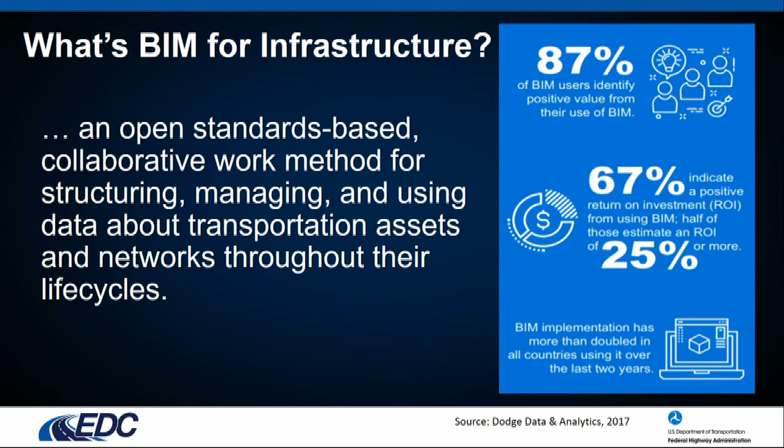Our first presentation is going to be BIM for Structures, the Pooled Fund, and the move to openBIM standards, because data standards are what are going to help us be somewhat more seamless. Maybe not completely seamless, Terry. So we're going to begin with Jennifer Steen, who is the BIM director, I think, for local roads and highways for HDR, and then also Roger Grant, who's the vice president of building technology for NIBS, National Institute of Building Sciences. So come on up, guys.

And do we just use the clicker? This looks fun. I didn't have this in my last one. Oh, and I just realized I have a fun typo right there. So we're going to talk about the pooled fund, which is lots of fun.

Okay, never mind. So today I'm going to talk about the Structures Pooled Fund overview and then pass it off to Roger, who's going to get into the nitty-gritty and the fun part about this project. So, the overview. Has anybody ever heard of a pooled fund before? Okay, we've got some people.

So for those who haven't, what this is doing is that these states, there's 24 states that have come together, and they've pooled all of their money together to do a 5+ year project to be able to do a lot of research. And this is going to help impact all of these states and the US in general. So these are all the states that are participating, and they're trying to come together to be able to develop these standards that we're going to be talking about.

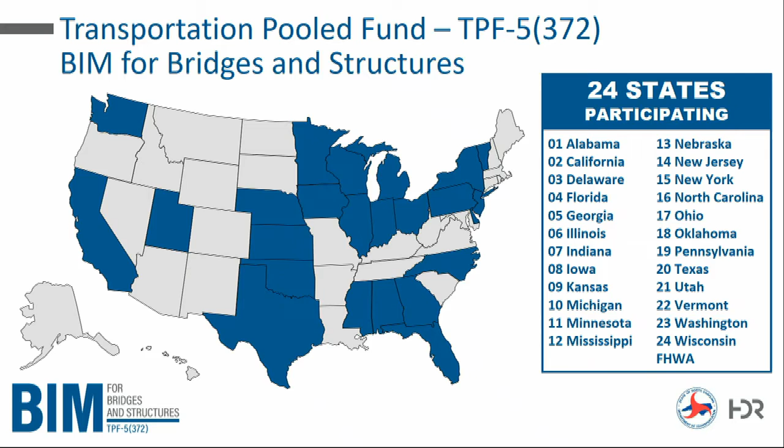So if they try to do this individually, it probably wouldn't work as well. And as we know, $100,000 isn't even like a quarter of some of these NCHRP research projects. So pooling all this money together to really make a change. And so they're focusing on the bridges and structures. So this is the BIM roadmap that they've come up with.

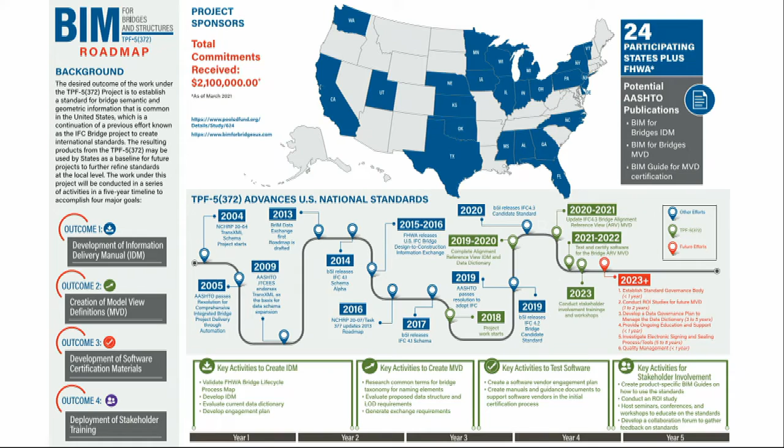So you can see this roadmap online, and as you can tell, we started the project itself in 2018, and then we've continued forward, and then we have some future work that we're doing too. So this roadmap also explains all the outcomes that they're looking for and the processes that overtook it. So next up, I'm going to give it to Roger, who's going to explain all of the fun stuff.

Yeah, all the fun stuff.

Well, thank you. And so I did want to talk about the pooled fund and what it was set up to do and what it has accomplished, and a little bit about why it's important. There's a lot going on in digitization of the way we work. This has been happening for a while, but I think there's momentum gathering and needs are definitely there.

So getting over to digital delivery, getting to transition to using a model of a project versus a set of drawings about a project as the basis for the work requirements is really important and starting to happen, and getting to digital materials to review and approve is also a big transition.

And as David said, I'm with the National Institute of Building Sciences, so we work a lot with vertical buildings, and these kinds of transitions are happening there, but maybe it's taken a while for this progression to really kick in. And in fact, we're seeing in the infrastructure world things moving a lot more quickly. And work like this fund is part of that work that Federal Highway has been investing in, as Jennifer showed on the roadmap in the years prior to the start of the pooled fund, has led up to that.

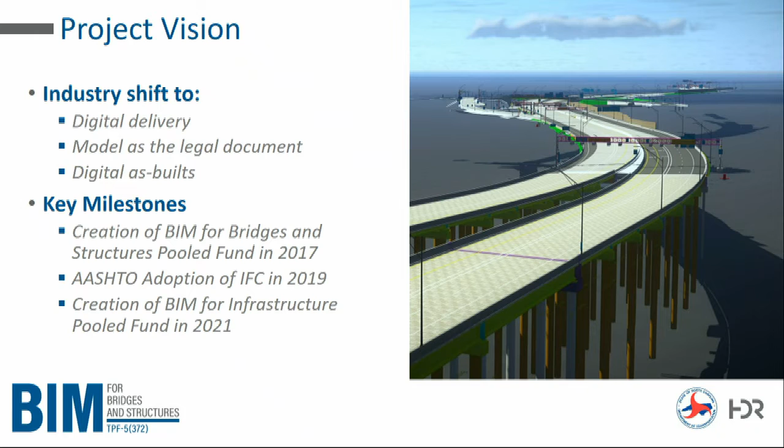And another key factor that you noticed from what Jennifer shared was, a nice thing in infrastructure, there are 50 owners of all the assets that we're trying to use these processes on, versus in the building world, there are thousands and thousands of owners, and the market power is not nearly as consolidated. So that is one of the advantages, I think, in the world of infrastructure and the development of common and shared and digitalized ways of working.

And this is the vision of the project, of the pooled fund, and really, along with what David said about building information management and modeling, it's really to develop an open way of exchanging information that's non-proprietary, that has some value to the owner of the asset, not just to the other people involved in the process.

Certainly, technology has a range of ways of delivering value, but what's really important is to be able to share and exchange information across the whole life cycle and have it be useful for the asset owner. And in order to accomplish this, the idea was to develop an open standard that could be used and the information could be then shared. And so that's where IFC, Industry Foundation Classes model, came into play. It's an international open standard for representing

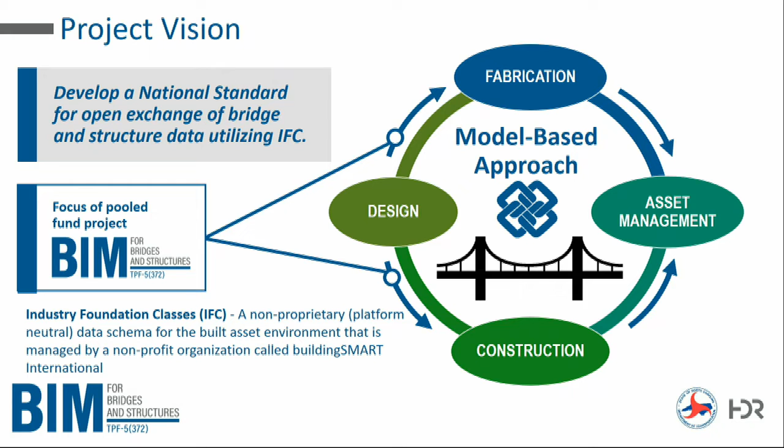data about the built environment. How many people are aware of what IFC is or have some knowledge of it? Okay, a few. So I'll just give a little background on IFC. IFC is one of three standards that work together to achieve interoperability, and it is accompanied by a standard for describing a process, which is an information delivery manual approach to develop a standard process.

IFC handles all the identification of the visual and the data aspects of a thing that's being built, and then the IFD works to create the terminology, a common set of terminology. And in fact, in the pooled fund, we're working with all three of these standards.

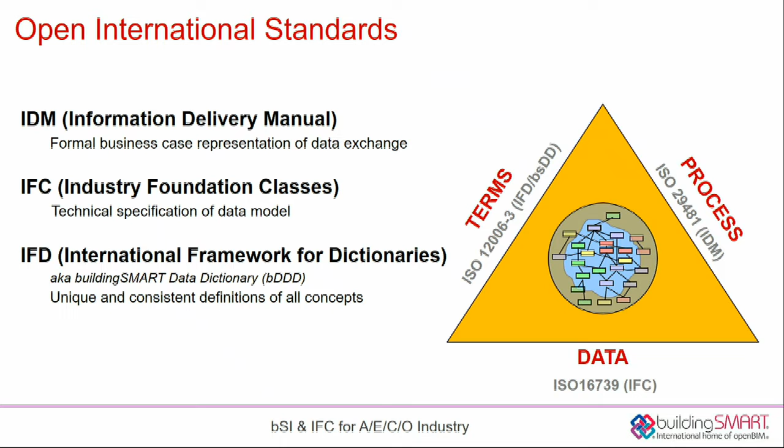They were developed initially by buildingSMART, which was started in the US in the 1990s by Autodesk and other technology companies, but it has since progressed, moved to be used around the world. It's been also balloted and adopted as an ISO standard, which is really important, maybe more so outside of the US than here, but ISO standards are the foundational elements that then get used in regional and national standards.

So in Europe, there's a common European standard framework that references ISO standards and adapts them, and then there's national standards, British Standards Institute, DIN in Germany. Here in the US, the comparable organization would be the American National Standards Institute, but the development of these kind of standards through this comparable framework here in the US is not as advanced as it is around the world, and so we're working on that.

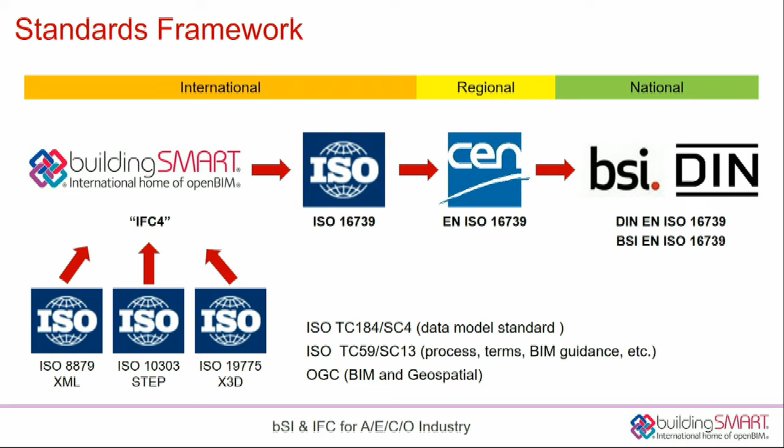That's a little bit of what we're aiming to try to do here in my organization and in others to advance these international standards and how they're applied and get the benefit from them. So maybe you want to know, what is IFC and why do we care about it? It's a non-proprietary open standard method of describing built environment and freely exchanging and viewing the information digitally.

So it's for digital, it's about information, it includes geometry and data, information about the constructed elements. It tells you how to model it in a model authoring system, as a solid or as the surface representation, that's all encoded in the standard, so it can be described and then the computer can render it. But importantly, it also includes semantics, attributes, relationships, there's a hierarchy, there's a schema that describes all of this that can be read by a computer, and that's the critical thing.

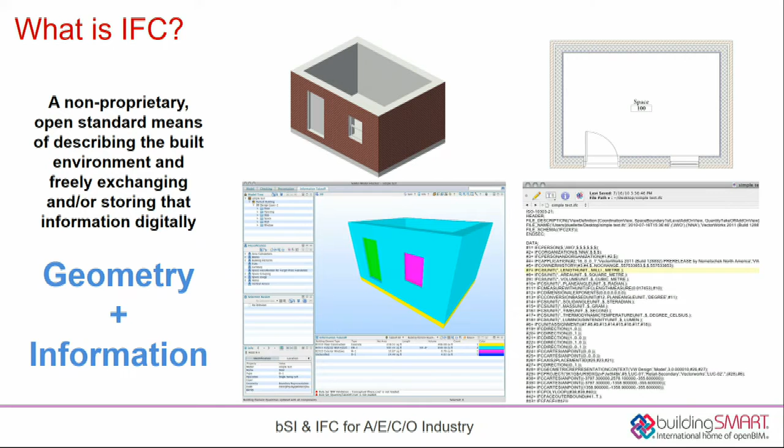It can create the visualization, but it also carries a lot of important information with it that can be used for multiple purposes. It also started with buildings, but it now has been applied to all kinds of assets. In the latest version, alignment was added, and that really opened it up to the use in infrastructure. We've worked on it with bridges, but it's also being used with roadways, tunnels, and railways in particular. Around the world, there's a lot of activity in these other areas.

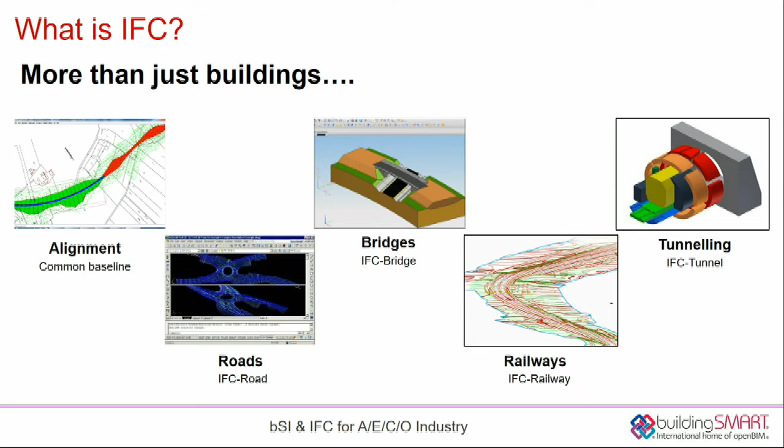For bridges, the interesting thing about bridges is they have a lot in common with buildings, and so we could use the kind of approaches we use to model buildings on a coordinate system and test those against the alignment system to figure out where to place things, and also what are the relationships that needed to be made, allowing a structure to have parts, allowing those parts to have components, allowing those things to all be put together. In buildings we talk about beams, in bridges you talk about girders, but they're the same construct.

And so we went through in a research project for Federal Highway that my organization did to test how IFC would work for bridges, and made those kinds of initial relationships. And then the pooled fund picked that up and advanced it and continued to add to the implementation for bridges.

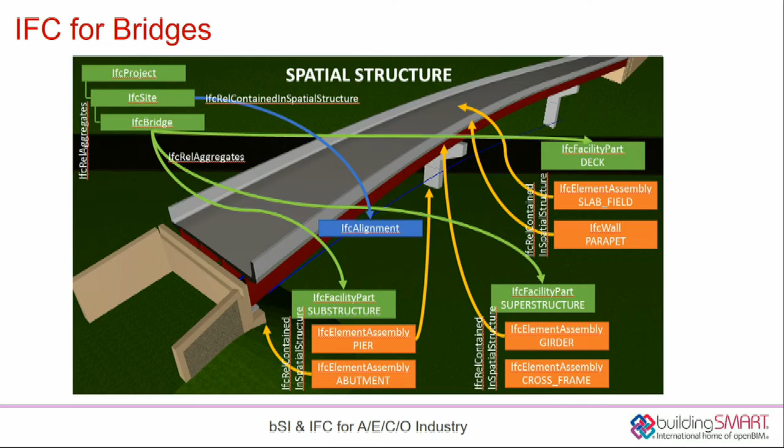It's important to know that IFC has been in place for quite some time, and it will continue to go forward. It is something that is not done. It is always evolving and being built on. New versions are coming out. We're on version 4.3 right now, and that will continue to progress. But what's really important about it is it has to be implemented some way, and that's where software companies need to come in to make it useful.

And there are already over 200 software companies that integrate IFC around the world. About a quarter of those have been certified in their use of IFC. These are just some of those companies. What's important about that is, in order to have interoperability, in order to move data around, you need to have it be transitioned from one application to another one.

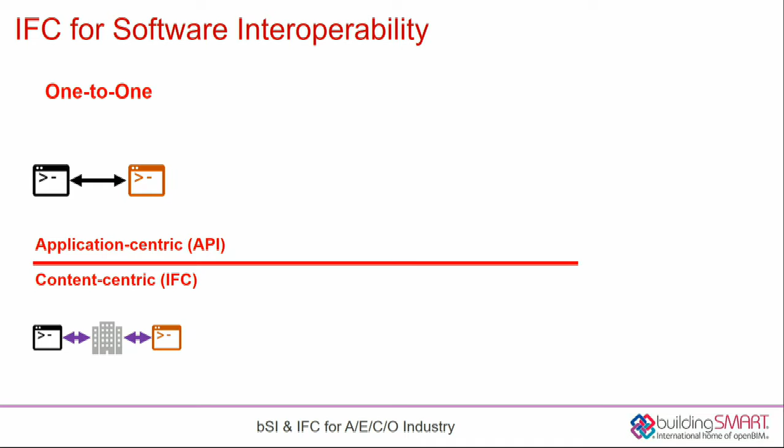Lots of software companies make ways of working together, but having a standard in the middle is a better scenario because you can leverage things a lot further. You can put multiple packages together through the standard, and those packages can then integrate to other packages by just going through the standard instead of having to make all these multiple application-to-application mappings.

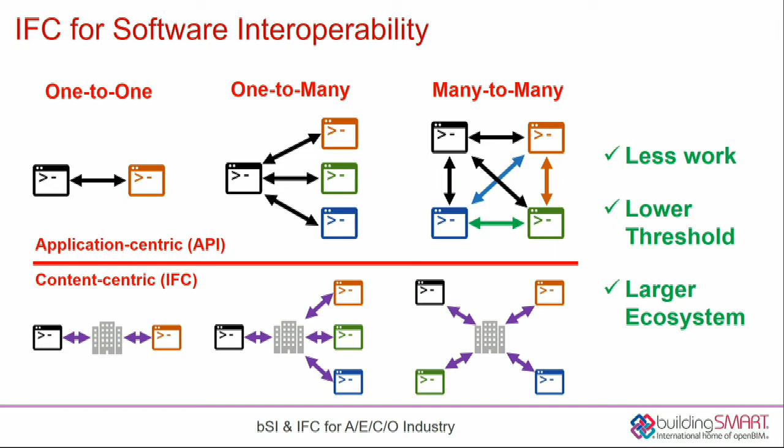So less work, lower threshold of interoperability, a larger ecosystem, theoretically more innovation, less cost for the owner. This is what an open system will do. This is what something like IFC allows. This is what's important about it. It's what's really important about it for government, because you don't want to request proprietary solutions to your problems. This gives you an open standard-based way to achieve interoperability, get your data, and hopefully have your data be reusable

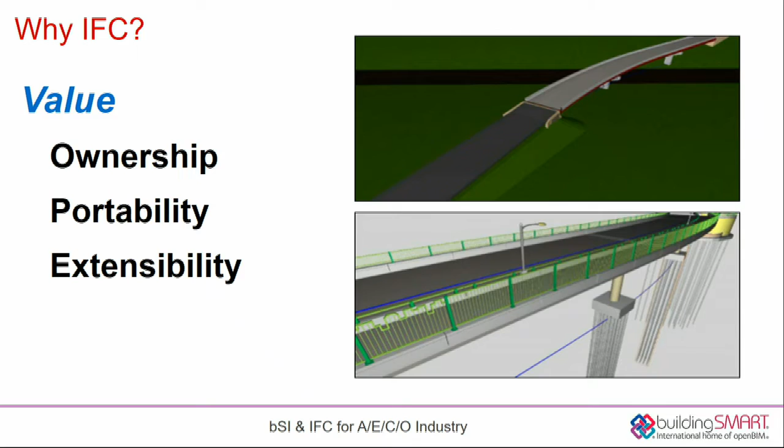over and over again. So that's the advantage of an open standard, is owning the data, the information, which is critical to the asset owner, having it be transportable, movable. You can share it between multiple applications. Very importantly, you can map it to your internal systems, which is a big thing that many owners need to do. They've got all kinds of legacy systems. And then it's extensible, it keeps moving forward, it can be built on top of. So that's kind of IFC and why we got into it.

And this project did some more research to look at the way the processes were documented, the way terminology was used, trying to work that through, and also take the IFC development work that was started by Federal Highway and move it forward, wrap it up, use the latest international work, and pull that together into the documentation of how to use IFC for bridges, and then very importantly, start to work with the outside community to get them to adopt and use this IFC model as the basis for how to exchange data about bridges.

And then finally there was some economic analysis. Everybody wants to know, is this really saving me money, or is it costing me money? Why should I do this? Of course, I would say just have faith and go forward, because it's better, but not everybody listens to me, and to some extent it is a bit of a journey. The value keeps accruing and building, so it's important to keep looking at why do we do this? What's it saving for us? How can we

justify it? The team that worked on this was HDR as the lead contractor, and then there were some sub-consultants that helped to do those tasks and activities. My role was, since we helped to lay the foundation for this pooled fund, I'm an advisor to the executive committee of the pooled fund. So we've worked together with this group of consultants and with industry. We've gone out and gotten software companies to participate. It's great to have a standard, but if nobody employs it, then it's not going to provide the value. So working with these software companies is really important, and that's going along.

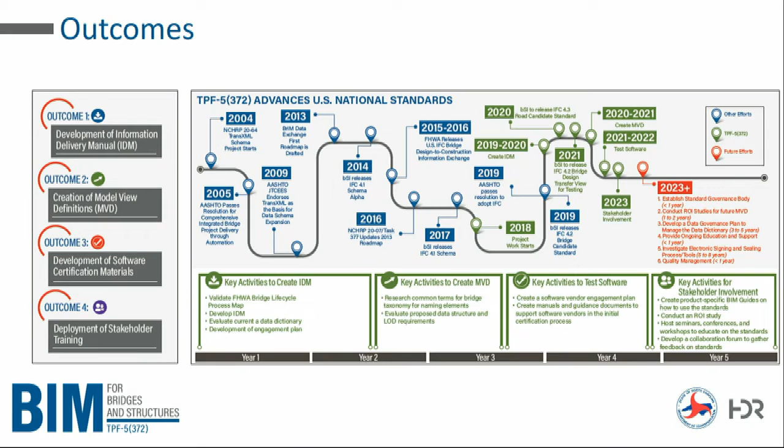And hopefully create this ability to have models that can be shared, exchanged, used, provided, with the data in them that's needed. AASHTO has voted as a community to support and use IFC as a modeling standard, and then at the meeting in Pittsburgh this year, they adopted the IDM, the Information Delivery Manual, as an AASHTO guide specification for the process of design to construction.

Now, there's other processes, and the idea is to have this be an end-to-end solution. So that's one of the places where the pooled fund might go next, to help build this community of having requirements established by engineers designing a bridge, have that information be used effectively by the software, not have a bridge model that all of a sudden has a light post going down out of the bottom of it when it's supposed to go up out of the top.

These are things that happen, but that's the kind of thing that testing does, and having the software be able to do that, multiple packages, ideally will get us there. It will allow the bridge models to be visualized in a consistent and common way, and supported with visualizations that become more and more accurate as the project progresses, so that design can be done at a preliminary stage, and others can be engaged, which is important.

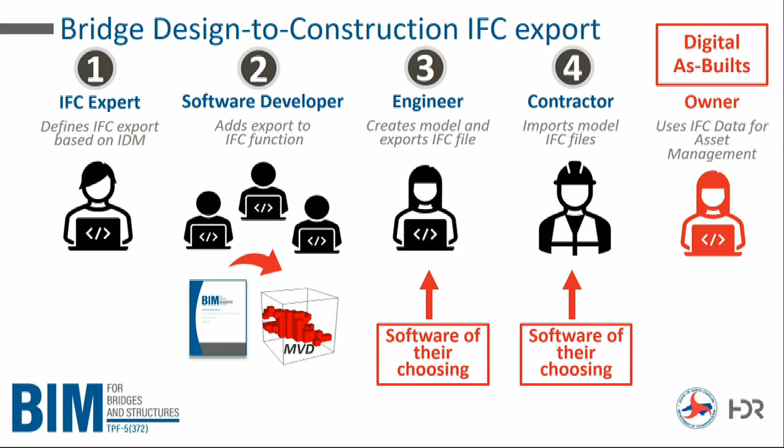And then get that over to be able to be used by contractors and ultimately to the asset owner, so they can reuse that model over and over again. And the vision is that the states through AASHTO would be able to have different kinds of assets that also follow this.

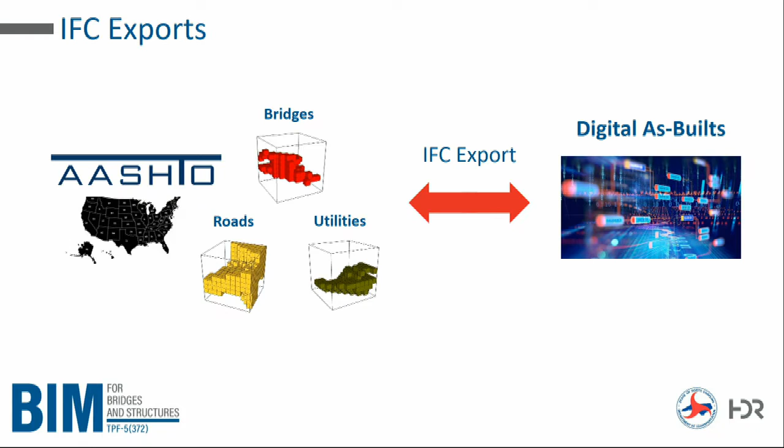AASHTO and Federal Highway have just kicked off a pooled fund for roads that would take this same process and apply it to roads, or maybe it's really for infrastructure. So roadway would be a focus of it, but also these other infrastructures. And then we'd get to the point where we have this common standard, we can use it to go from design to construction to operation and end up with our digital as-built, or as we like to say now, our digital twin. So this is our strategy for BIM to twin for the infrastructure world.

And so that's what the pooled fund is doing.

I think we can take a few questions now if we have them. Any questions? Any answers? Go ahead. I think there's a mic there in case you want to use it.

Hi, good morning. So if my agency is looking to get into using BIM, should we hold off until this becomes the standard? When do you expect this to be deployed mainstream?

Well, my answer to that would be don't hold off, because this is not a one and done thing. This is really a journey. You have to start with crawl, walk, run in order to really get implementation of this. So the standard will help make it more effective, but there's a lot of other things needed to get your requirements in place, to get your contractors starting to use it and understand it, and then IFC will be added on and embedded in the software. So ultimately, when IFC is working, we as practitioners really won't even know it's there. It'll just be the way that data gets to where we want it to go.

I just want to agree with Roger, and tell you that we have some implementation plans built by other agencies, kind of capability maturity type thinking that breaks the elephant of BIM down into more manageable implementation. If that makes sense, please feel free to contact us. So, other question? One more question?

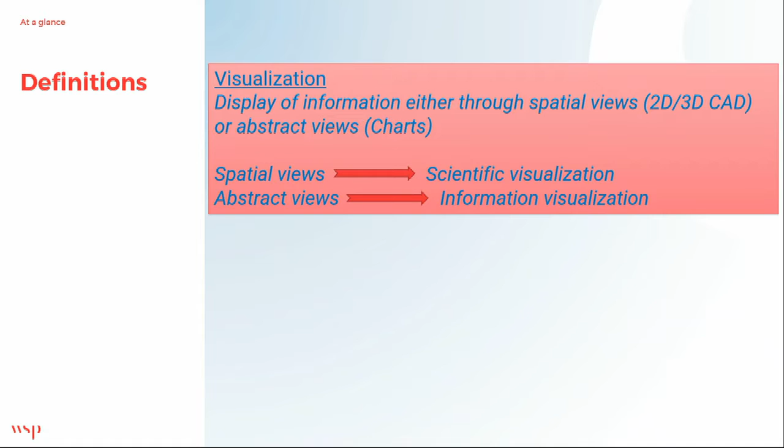So there's a stream that's called scientific visualization. That's associated specifically with spatial views. And then the second one is abstract views, which is taking data, numbers and things like that, and making it understandable. That's called information visualization - heat maps, tornado graphs, and things like that. You'll see a lot of those in this conference, you probably already saw them. So that's taking abstract data and visualizing it. But we are sticking to spatial views, which is scientific visualization. And there are many, many applications of scientific visualization, and I'll show that in a bit.

Now, how does this collide with BIM for infrastructure? This is a definition in the Federal Highways National Strategic Roadmap: a collaborative work method for structuring, managing, and using data and information about transportation assets and networks throughout their life cycles. David mentioned better information management - that's basically what this is. It's not about a 3D model or a 2D graph or even a paper document. It's more about how the data is structured and how it is modeled so we can use it.

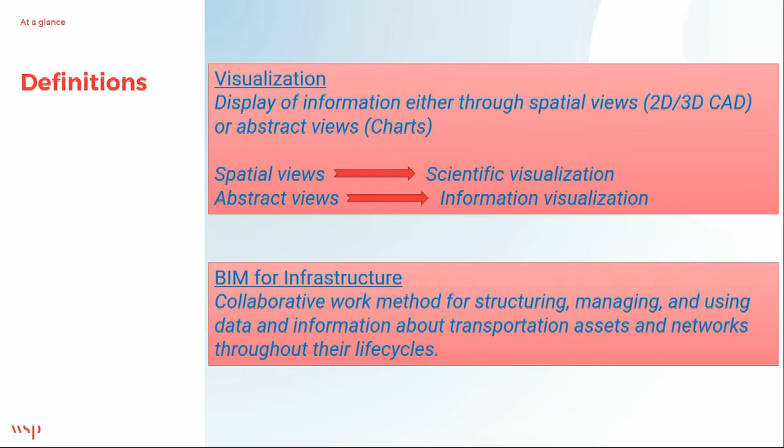So when it comes to BIM and visualization coming together, in certain phases we specifically talk about 3D modeling as the data model. The 3D design model becomes our data model, and it helps us see things and get insights. But as you move on to the other phases of the life cycle, the 3D could become a 2D, could be a GIS map, and could present information to us in ways we have not seen before. So it's both 3D and 2D, but it's tied to spatial views. I think that's where it comes together.

The domains exercised in visualization, and you'll see this: computer animation, computer graphics, image processing, computer vision, computer-aided design - a topic of 3D modeling and BIM in general - and human-machine interaction and signal processing. Technically, all of these fall under scientific visualization techniques. Think about what has moved into the BIM space - the game engines people. They have actually created real-time visualizations, much richer viewing of an engineered model, so we can actually see operational impacts of what we design and put out there for the public.

So think about where the industry is heading. It started with static imagery, then it went into animations, into graphics. That world, as you know from seeing movies, is just exploding, right? We're getting richer and richer content.

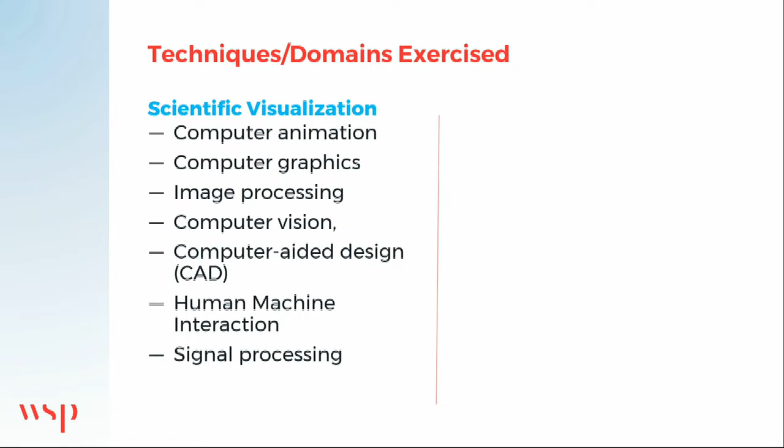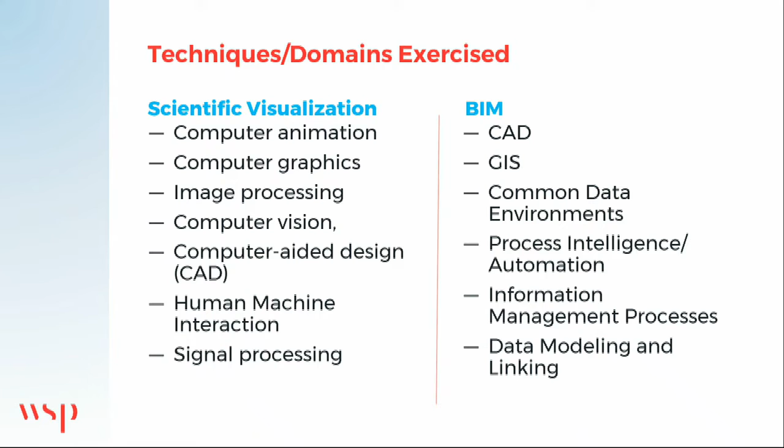On the BIM side, we talked about in the BIM track sessions CAD information, GIS information. We talked about common data environments which bring all the information together, including dynamic data like sensor data, process intelligence, workflows, and workflow automation, information management processes - which BIM is actually technically an information management process. We also call it a BIM model, and that always gets me - it's a BIM model in terms of a noun, but it's not a delivery. It's a BIM data model always. And then data modeling techniques and how to link data - that's the discipline of BIM.

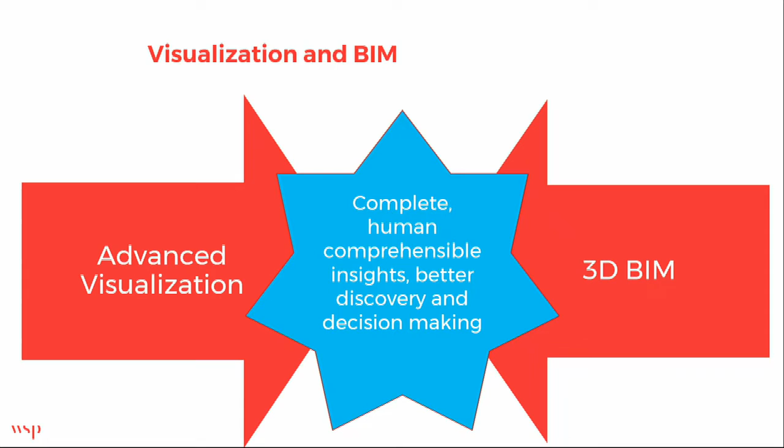So when these two come together - advanced visualization techniques and 3D BIM - you have outcomes that are more than the sum of parts, in the sense that we get insights into what we're building which we would not otherwise have had. You have to mix the scientific visualization discipline with the BIM engineered modeling and data modeling discipline to be able to get views that improve our comprehension and insight of what we're building, discover things we could not have otherwise seen, and help in decision making. And that's the whole point of this. It's a very visually rich environment, and visuals always drive human interaction or human understanding more than words, or even graphs. So especially real-time visualization is getting more and more play in this.

So how do visualization and BIM come together?

There are many, many places where visualization, especially spatial views, and BIM can come together across the life cycle. In planning, for example, think about environmental analysis. You're trying to give alternatives to the public, say, this is my alternative for design. What better way to give them an immersive view of the alternative? Not just a picture, not just a rendering. I'm talking about an interactive, where they can actually go, click, see how things are.

And that's what scientific visualization can do for you. It can make the invisible visible, because they can see it from multiple angles, multiple perspectives, different times of the day. Those are all things that the visualization discipline brings together. Design: use cases related to design review and sustainability analysis. We're talking about carbon neutrality now, net zero.

When you have goals in design, those are hard to put on paper and just document, like words on a page. It's better to show emissions in terms of analytics tied to bridge infrastructure that's being built through the Bridge Pooled Fund IFC exchange, for example. So there's a lot of use case analysis in design that we all know, review of design, and other things that design has to do.

In construction use cases, construction planning and execution, it's a bonanza for them. That's where most of the visualization and BIM have come together, in work planning and work execution, especially during the construction phase, means and methods and things of that nature. In operations, several facility management operations are yet to be realized, but most of BIM and visualization right now is in the 3D, 4D world, where the schedule is linked to a 3D model.

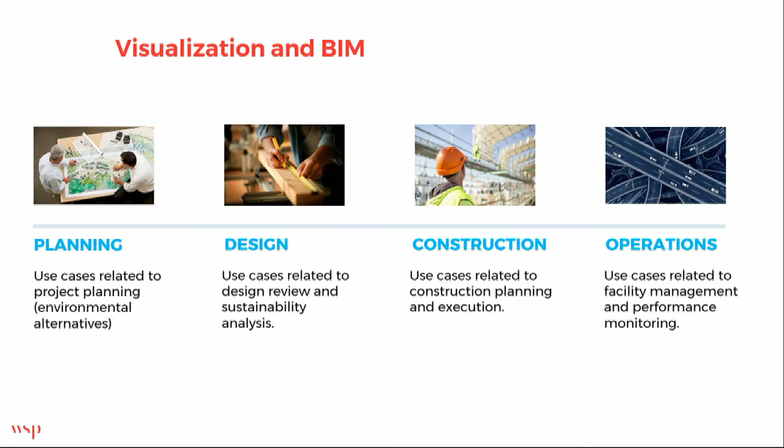But in the future, yesterday we talked about digital twinning. When you maintain that, not necessarily in a 3D spatial view, maybe it's in a 2D spatial view for linear infrastructure, start looking at how to manage the facility and how to do that visually. You get insights just from looking at a map, or maybe you call up a 3D model from the map as an attribute, or even do autonomous performance monitoring of that piece of infrastructure that you've built. So many use cases.

So there is an amazing paper that I came across, 2020, done by Moreira et al. I hope I got the name right. That shows the application of visualization in BIM. It's a really good paper that summarized what all the applications are. And you can see the explosion is generally in construction planning and construction fabrication procurement. There is front-end application in design, and now there is emerging application in asset management and decommissioning and reprogramming of assets.

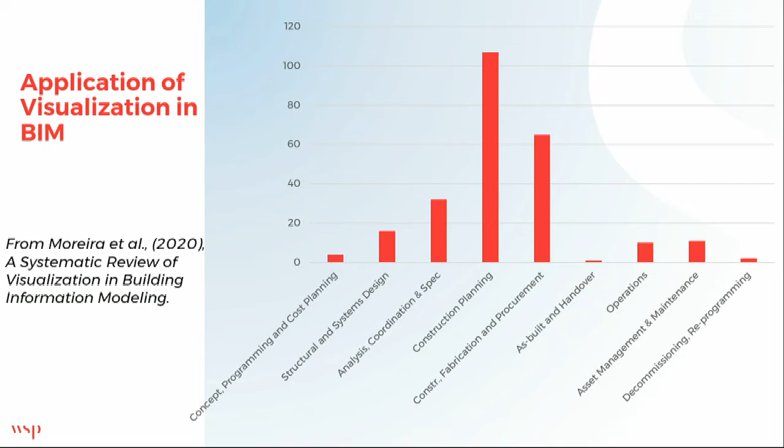But I think these two graphs from the same paper are better graphs, which show how with time BIM and visualization have come together. In the design phase, you see the design reviews and the richness of the design visualizations are improving with time, but you see an explosion in the construction works planning, as we mentioned, with 1996 on the far left, and on the right-hand side you have 2017. That's when the paper cut off its literature review.

But then you see operational visualizations creeping up in there. And then by use case, within the life cycle phases, design reviews and sustainability analysis, this is from the UK, but it's very similar to the United States. We don't have the net zero requirement yet. It is coming, right? It's on us. So we'll see the same pickup, I think. In sustainability analysis and design reviews, there is still significant interest. But what really is taking off here is the work execution, which is in the 4D modeling and facility management.

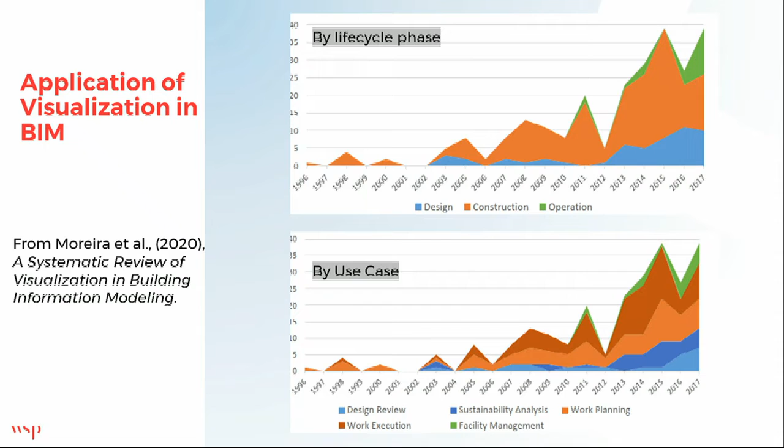So by use case also you see an interesting trend in terms of where BIM and visualization are coming together. The context of visualization has also changed. Initially visualization was used for client approvals and public approvals. Now, as we saw from those graphs, we're getting beyond that to design coordination review, to clash detection and scheduling, to facility management and operations. So there is a demand to bring these two disciplines together.

And the part of making the invisible visible is, think of the power of visualization. Have you ever seen an image of a black hole? It's basically scientific data brought together in a graphical format. It is a technique. Similarly, and I have pictures later, the neutron collision is another. Things that we cannot see can be seen in visualization.

We may not go to a black hole level or even a neutron star collision level, but Kevin is going to come up and talk about a specific project in which a lot of these things have come together, a pretty major project, and hopefully he'll illustrate all of these as we walk.

No pressure, Kevin. Yeah, thanks, Jay.

So we thought this was a good example of that synergy between visualization and BIM. This is a project we're doing for Connecticut DOT. WSP is the program manager. We're working for the client. HNTB was designing the bridge. And then there's a construction JV that's doing the planning, the scheduling, the planning for construction.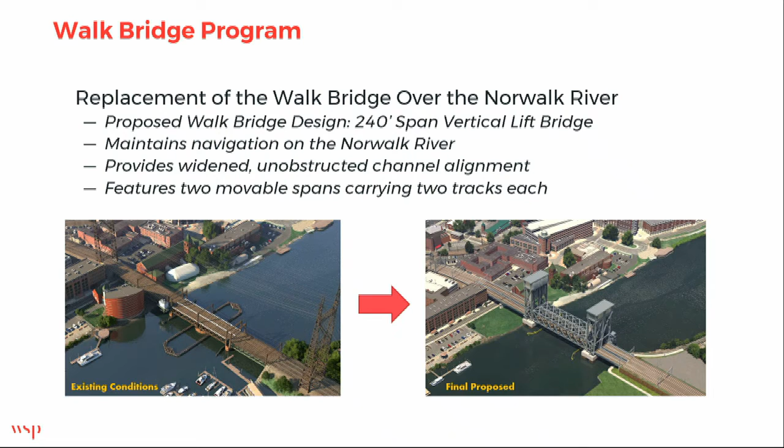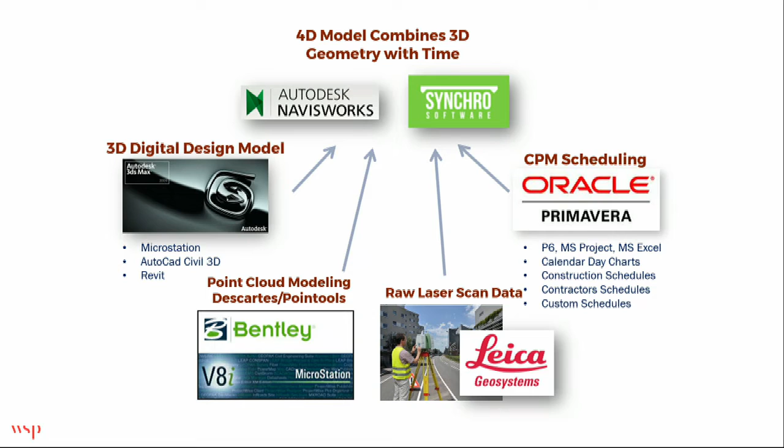Early on, we knew that we were going to be seeing this model through construction, so we tried to develop a process and identify some tools that we would use throughout the project to support different goals for the outputs of the model. Very similar to the graphic that Jag showed, where there were certain goals during design, certain goals during construction, and ultimately the model will hopefully evolve into something to be used for operations and maintenance.

We tried to create a collaborative environment for the model so that everybody was benefiting from using this common model. We established a common data environment, coordinates, naming conventions, somewhat of a BIM execution plan, but we didn't call it that when we developed it. It was really just a way to share data across the life cycle of the project and use it for different goals depending on the life cycle stage of the project.

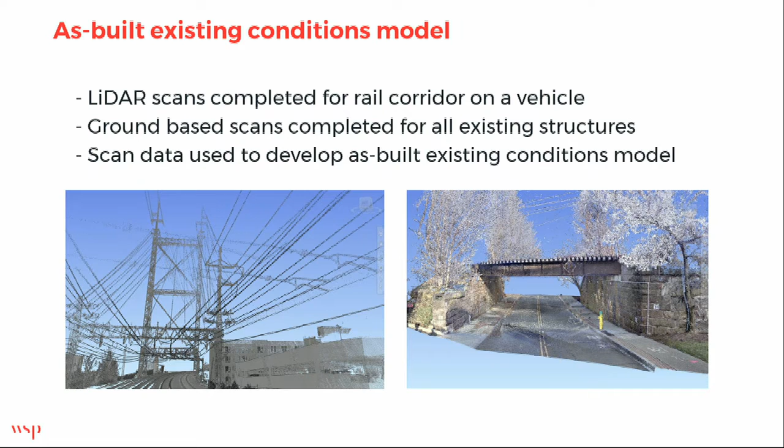So early on, the existing model, the context model for the project, was developed around existing conditions that were captured using LiDAR, both LiDAR along the tracks as well as captures for each of the older structures that were being replaced. And that was turned into an existing conditions model. We wanted it to be very accurate, both for clash detection of the proposed designs, but also just to really represent what the project was going to look like as accurately as possible.

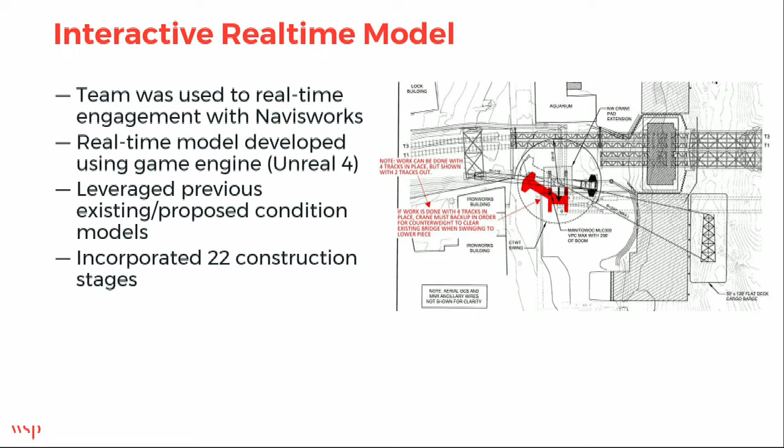Early on, we were using Navisworks, and we were using rendering tools like 3D Studio Max to produce visualizations. But as the project got closer to construction and the contractor was developing means and methods for building some of these complex structures, the team started wondering, and the stakeholders started asking, what was this project going to look like during construction? We don't want to know just what it's going to look like when it's done, but what will it look like during these 5 years of disruption to the town?

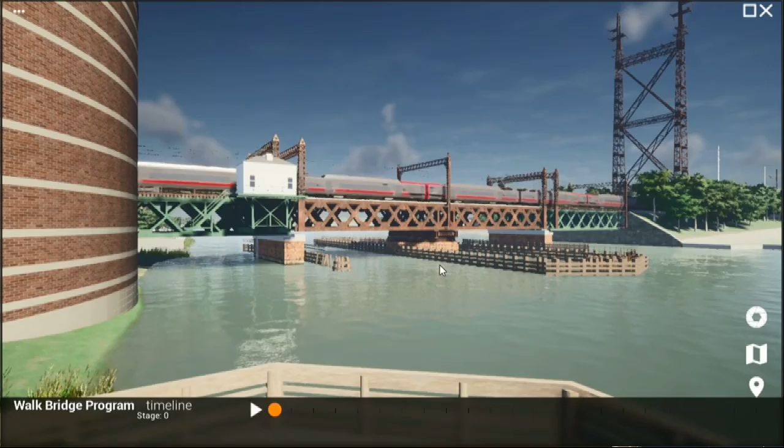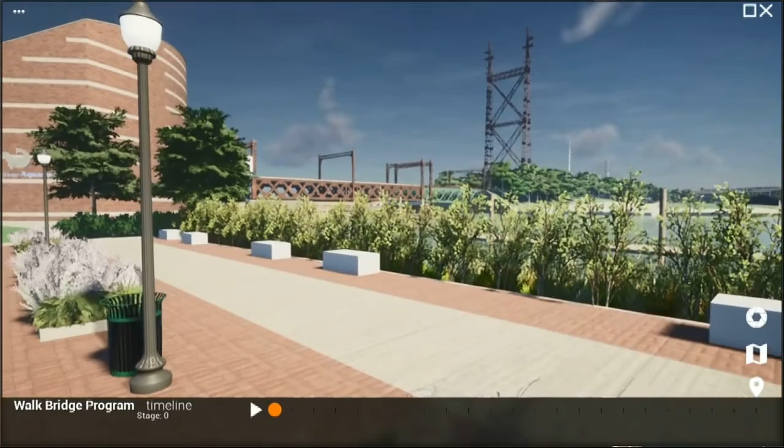And so as part of that, we developed a real-time model that was intended to be used both for stakeholder communication as well as internal communication for the team, something we could all look at and collaborate around. Some of you may have seen this outside. Originally, it was just a before and after model showing what the project was going to look like once it was complete. But as part of the development during construction, we incorporated the construction stages of the project into the real-time model so that you could walk through and see in real time what the project would look like during those stages. So here I'm scrubbing a little button, and you're seeing the stage number on the left. This is what the site will look like during these various stages of construction.

So when the project reached 90% design, the schedule was becoming a critical part of the project process and how was it going to work. HNTB and the CMJV were working together on how we were going to build this thing, and they were developing a lot of concepts for those construction activities. But the schedule was becoming the critical part of it.

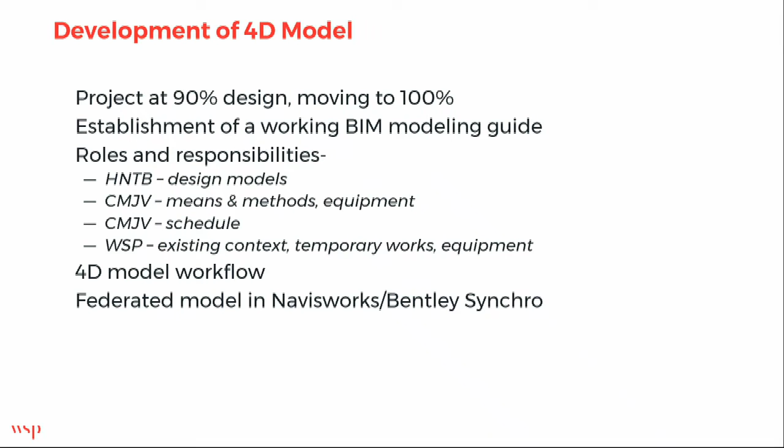So we made a decision working with the contractor to start developing a 4D model in Synchro, mainly because the scheduler for the contractor had used it before to help refine and develop schedules. And so they made a commitment to use Synchro for the 4D model. Again, it's the benefits of a 4D model. You've seen other presentations about that.

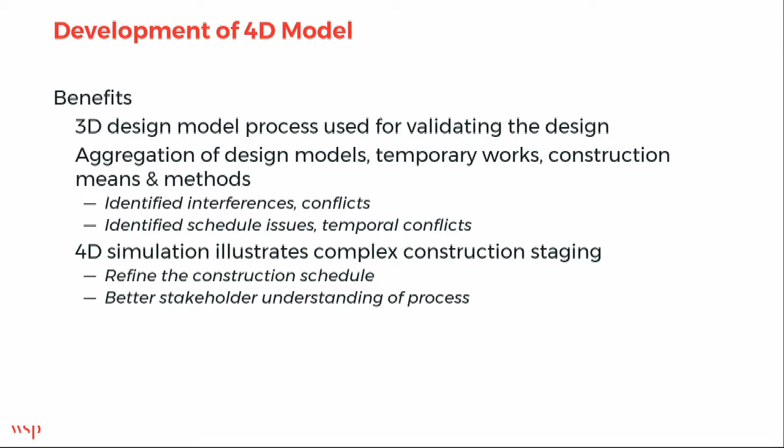You know, it refines the schedule, it finds temporal conflicts, it identifies where significant activities are occurring around each other so that you can plan around that. It was really about the construction activities and how those could be improved and risks could be identified. This was our process at that point in time.

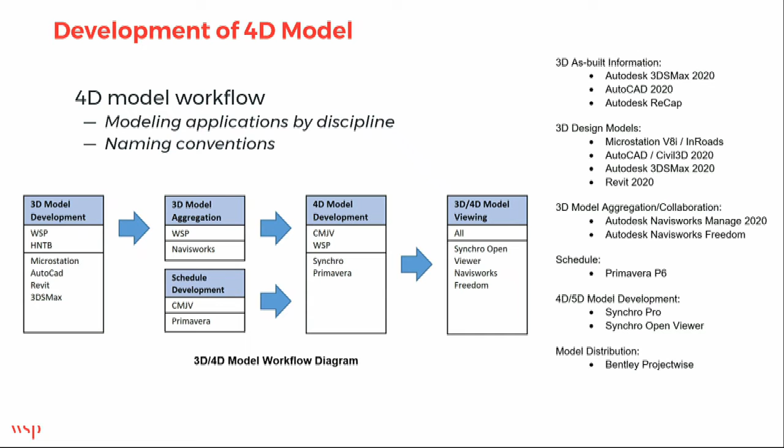Once we started working with a schedule, we developed a little more complex workflow, mainly because we were working in an environment that was really more conducive to Navisworks. So we were bringing our model through Navisworks, bringing in a schedule, linking them in Synchro, but we were also carrying this model forward as a real-time model in UE4 concurrently with the 4D model.

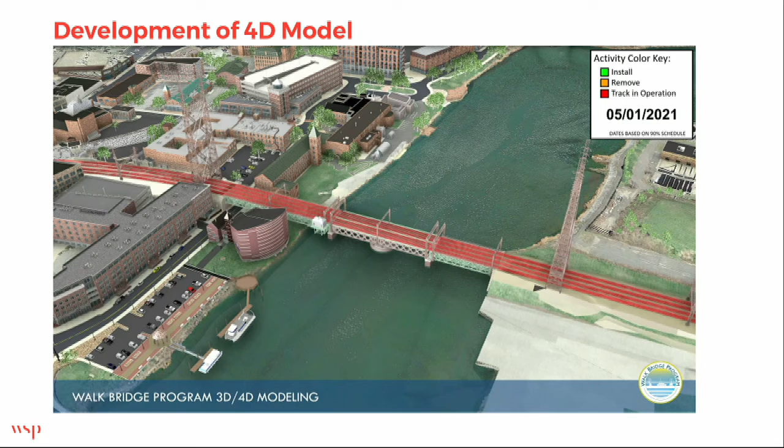So this is one of the 4D model renderings that we created for the project. If you're not familiar with what the term 4D model is, we have a schedule, we have 3D elements that are broken up by the activities, and then they're linked together in a tool like Navisworks or Synchro, and they allow you to create these simulations that show construction over time.

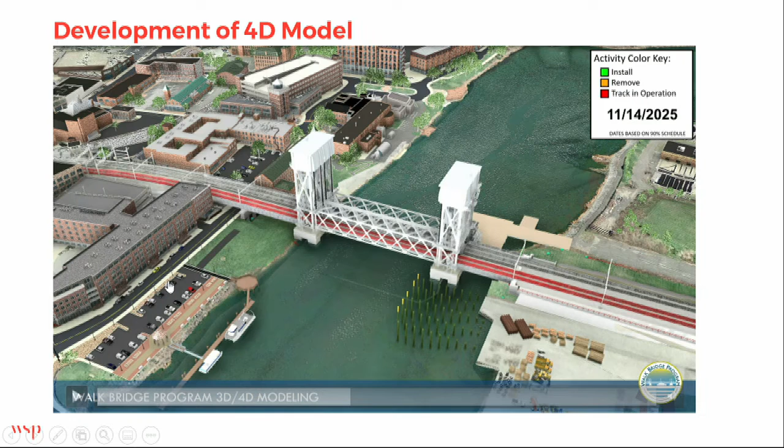And we put some equipment in there where there were activities identified for that in the schedule. But you can see that it's a pretty complex series of activities happening in a very confined space. So a 4D model was really a useful tool to communicate those risks and the complexity of the activity.

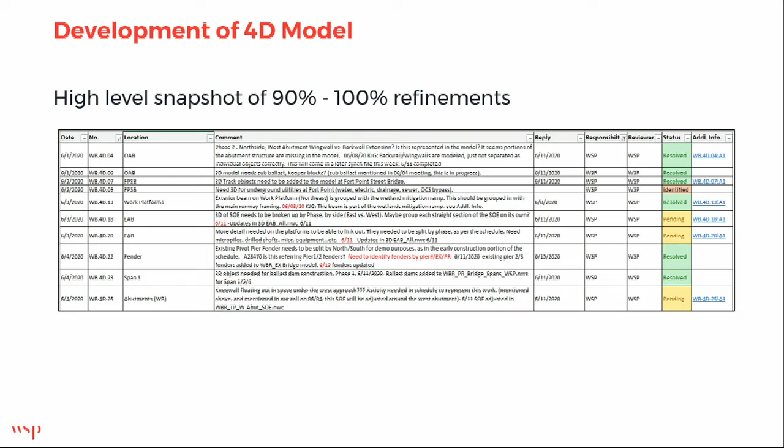So during this process, anytime an issue was identified, we met as a team, we'd look at the model, we'd review it, we'd identify schedule issues, design issues, construction issues, and those were categorized in a spreadsheet and then pushed out to each of the significant parties to resolve those issues.

And just out of interest, we did do sort of a quick run on what was found between 90% and 100%. And it was interesting that most of them were schedule related or just model issues. But there were some design issues that were found as well. So with that, I'll hand it back to Jag.

Thank you. Thanks, Kevin. So you may see this graph and say, what's the big deal about visualization? This seems like a standardized BIM outcome, right? You reduce clashes in a 4D, and I specifically asked Kevin, what was the visualization contribution to this, especially the scientific visualization conflict? And he told me that there were certain scheduling conflicts that would not have been picked up were it not for these renderings here.

You want to carry? Yeah, I think that when you run a 4D model, you inevitably find temporal conflicts, things that are happening concurrently to each other that are very hard to read in a Gantt chart when those activities might be spread way apart. So I think that it really helped them refine their schedule, even change the schedule where they felt there were issues that were happening at the same time that should be pushed apart.

Right. And then the second question I asked is, who found value in this? Is it the designer, the contractor, or the owner? And obviously, this evolved: the initial scope was public communications, then into design review, into now construction scheduling. Clearly, the value was seen by the owner because they were getting better insights with a realistic model that is interactive, that they could see in different settings and contexts, and they were able to monitor the project much more efficiently in virtual design and construction phases.

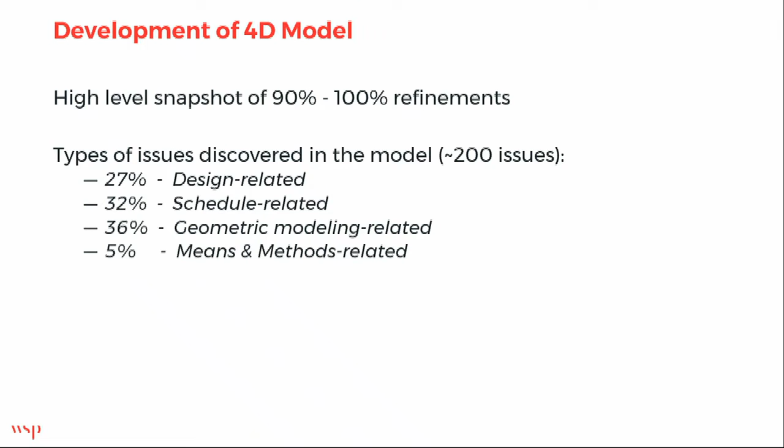So in summary, I think the project demonstration in general, what visualization does is it allows the use of spatial views in scientific visualization to compress pretty large volumes of data. In those little renderings you see, there is a lot of science behind how to render an image. The entire science of visualization is kind of compressed in tooling that we have available today. It compresses large volumes of data into a limited number of pictures.

It reveals correlation in different quantities in space and time. You saw the construction sequencing and the means and methods of the crane lifts and things of that sort, which is not just photorealistic, it is actually engineering grade accuracy. You can actually do that and say, I built this project virtually, now I can go build it really with my real equipment, and it allows viewing of data selectively and interactively in real time.

There are traditional information visualization techniques like data, abstract views that can be superimposed with visuals. We're still not there yet. We're not using the great work that's done in information visualization and combining that with spatial views. Data mining is a field, discovery, automatic, machine learning algorithms, especially for temporal conflicts. You don't have to see to react manually. You can actually do this with machines, and that's still to be done, especially in the temporality.

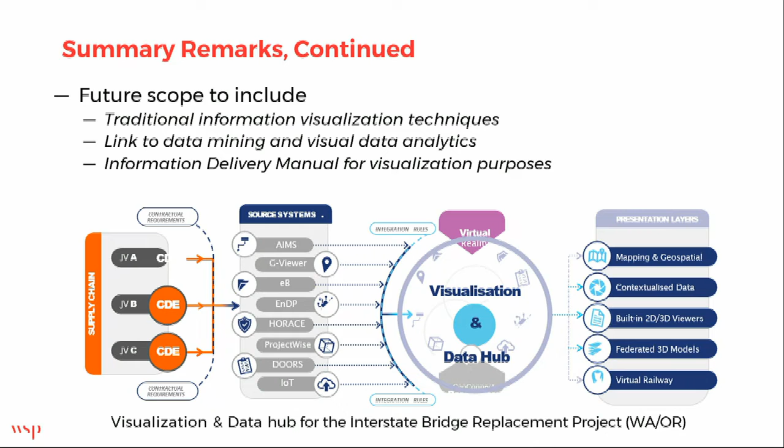So anyway, that's the end of our presentation. Are we on time? Yes. Thank you. We're in good shape. So, how about a question or two for Jag and Kevin?

Yes, sir. File size. What are the file sizes, Kevin? Yeah, I know, I'm just curious. I think the 4D model is probably about 2 gigs. The real-time model is more, that's 6 or 7 because of all the fidelity that's added into it. But they're becoming distributable, even at that size, I think.

Does it work better on the cloud, Kevin? You want to use the mic? Well, with the real-time model, we're actually investigating some streaming applications where the real-time models actually run on the cloud, and you're just using a client to view it. So that'll make that issue of size less important. But in terms of the 4D model and sharing it amongst the team, we had a common server, ProjectWise, where we could share it. So nobody had issues with the size of it. I think real-time viewing in the cloud is going to be the norm, if it's not already, right? Yeah, the thin client. So, John?

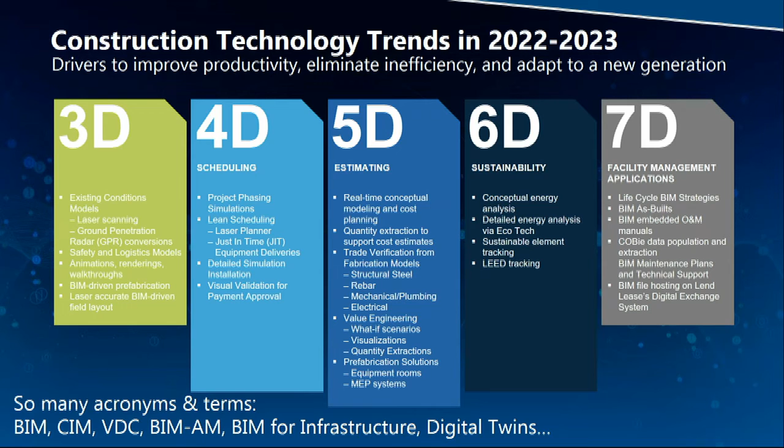I've been with the visualization committee for over 20 years, and back in the day, we were excited when we could tether a couple 486s together to render out one frame in a couple of days. Those were the exciting days. And we've migrated over time, as Jag alluded to. We're not in that 3D space anymore. We're actually beyond. There's many Ds we're all dealing with these days. And where do we fit into those Ds? Certainly a challenge as well.

As I mentioned earlier, there's a lot of tools we have to use today to make BIM, digital twin, etc. work. One of my observations during these last two days is we're considered the thought leaders in our field, yet we have so many definitions of a digital twin, BIM, 4D, or 5D. I heard, rightfully so, in several earlier presentations that we're not providing an effective message to leadership to implement these workflows. I think we need to look inward and realize that if we can't all agree on one term for a digital twin, then we've got some work ahead of us.

So again, these tools all have to integrate these days. As Roger alluded to earlier with IFC, we're thinking beyond one use of that tool. For example, you might use a digital terrain model for automated machine guidance and grading, but you've got to think beyond that now. What else are we doing with that data? How are we integrating it with other information? Are we not only using it for cut and fill and mass haul, but also integrating it with the schedule in a 4D mode so we know where we stand - are we ahead or behind schedule? Phil, in a few minutes, has some practical examples of that 4D workflow.

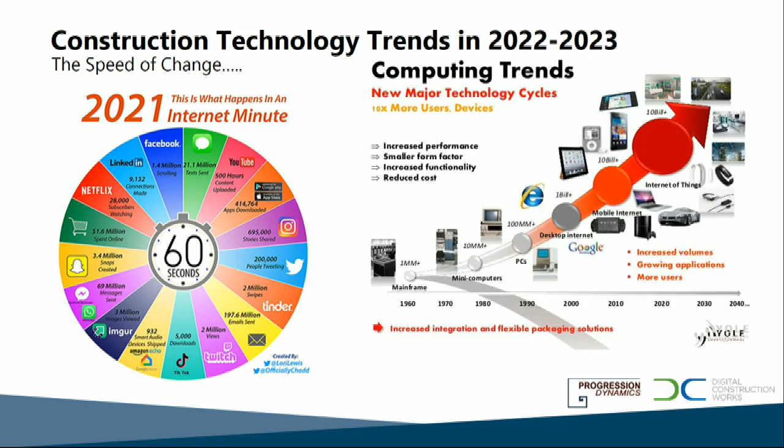But with top-down leadership, a lot of those walls are broken down. Again, I think we need a better message sent to the leaders of our agencies. A big one, which Phil will really stress, is engaging all the departments. When you're going to implement a digital delivery program, all the stakeholders are vital.

Observations I've seen through my talks are that stuff created in the design and construction phase really isn't of value to the asset management people, so they tend to not really care about a BIM model. But if you had talked to them and put those attributes or that information into the workflow, they would value it. So all the stakeholders matter, and Phil will talk in detail about that on a project.

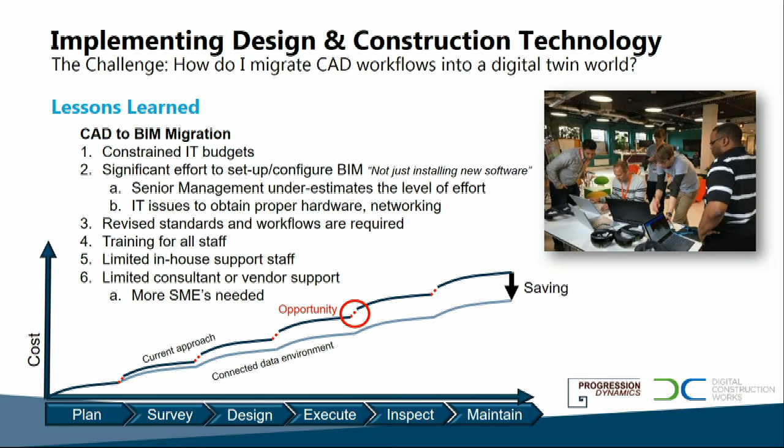I'm going quickly because I want Phil to speak. We still have a lot of analog workflows we're trying to apply digital processes to. We need to change how we think. We spend all this effort to create a 3D model, and then we end up creating PDFs to give out in the field. Again, you're still thinking with the old mindset. Stuff like that needs to change. And the adoption of the change is slow. I know we got a long way to go in implementing BIM, or digital twins, or digital delivery, or whatever we're going to call it.

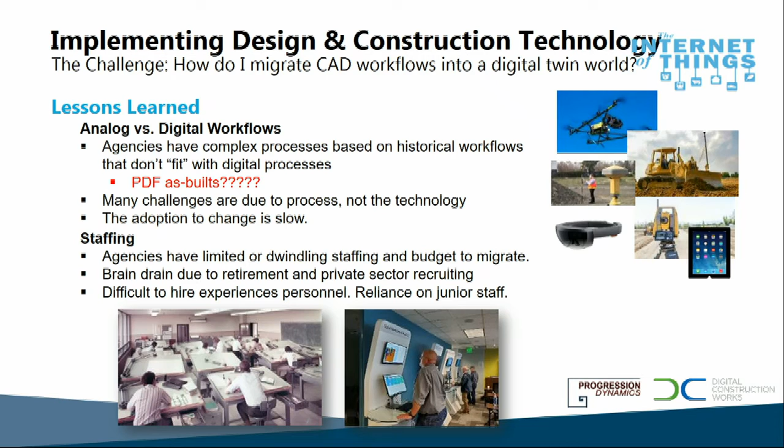So with that, I'm going to just pass it over real quick to Phil so he can actually talk about some of his experiences implementing BIM workflows on several NYSDOT projects. So Phil, I will hand off to you.

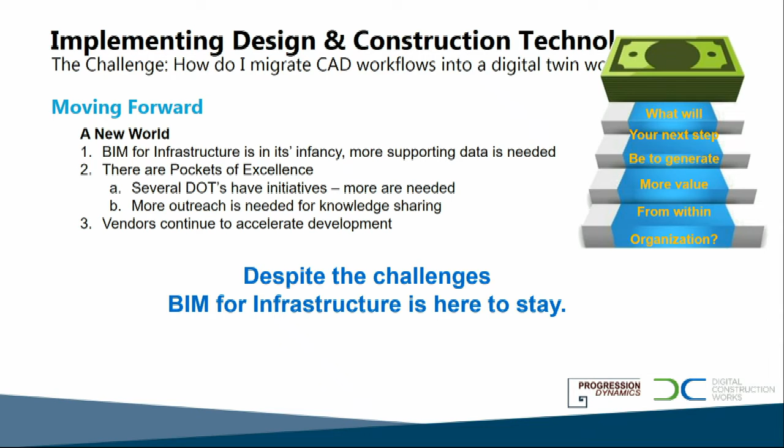Thanks, Chuck. Okay, we're going to jump ahead to the slide. There we go. Great. So originally I was going to talk about some of the ways that New York State DOT implemented the BIM program. But right now, I think I want to concentrate on actual case examples, project examples that New York State DOT is working on.

So just a few background facts: New York State DOT has had 12 BIM projects, and to date 6 have been completed, worth about $1.5 billion. And we currently have 6 in progress right now with a value of around $3 billion. And all of those are down in New York City, so that's the only region right now that's applying BIM and doing it very well.

We've been working there in the BIM world since 2016, actually starting with our first project. So in that first project, here's an example of the value of BIM.

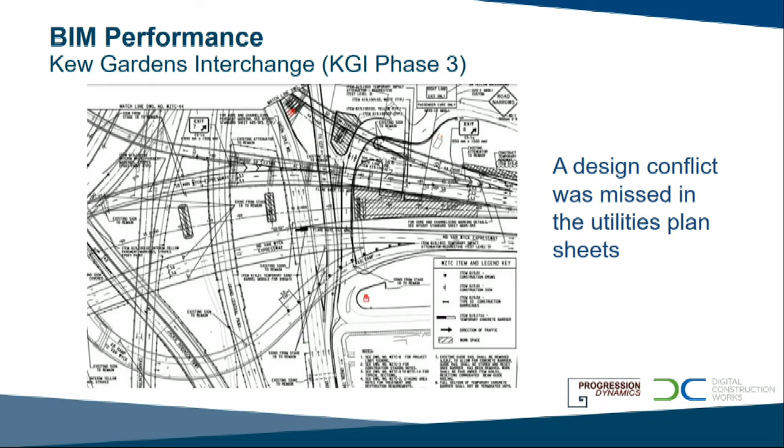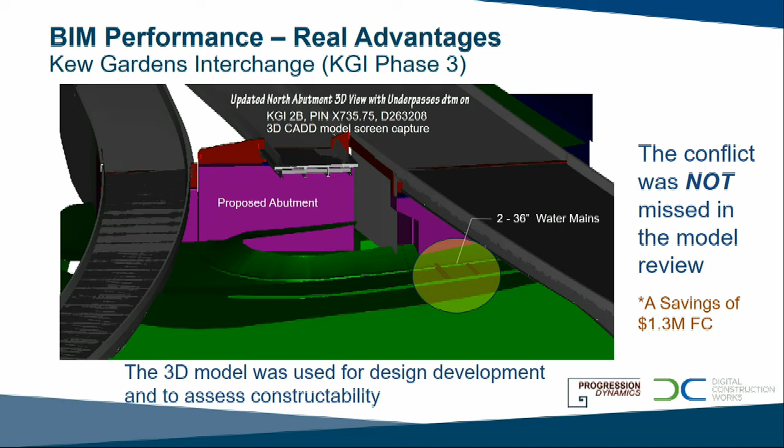So you have a 3D model instead of a set of plans. And in this case, there were utilities—this is an old slide, but it's so important because we started right off the bat reviewing a 3D model that was prepared by a consultant. You'll notice there's a couple speed bumps on one of the ramps. Well, those are two 36-inch water lines, water mains, that were in the wrong spot. So while this was out for award, we were able to identify that design error and make changes that saved $1.3 to $1.5 million right from the start. This was before we even let the project. Our first one was a design-bid-build, so we were fortunate because we were able to estimate what the cost of the BIM work would be to the contract, and then we were able to assess it afterwards to see what the value was.

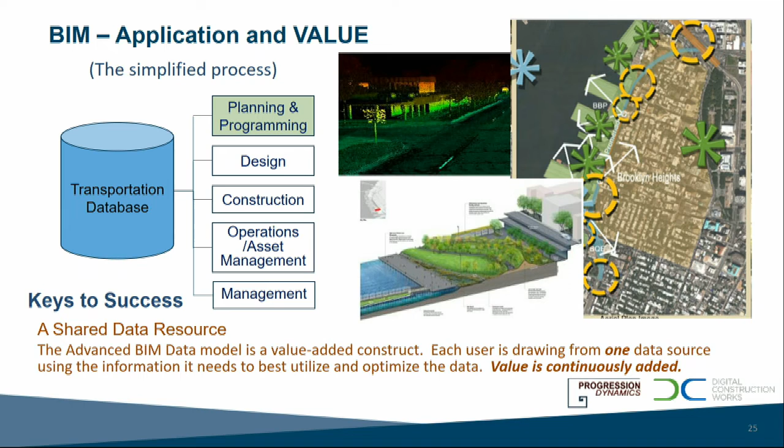So our process starts in planning, where we start to generate this digital information—it's a database, really an enterprise database for the agency. And then in design, I've heard people say BIM costs more, BIM costs a lot more. Well, not if you're designing in 3 dimensions in 3D CAD anyway, which New York State DOT's been doing since approximately 1995. So we're able to take those 3-dimensional models and use them for construction purposes, and that was a big change 8, 10 years ago, when contractors started wanting those 3D models. They were pulling that data—we weren't pushing it to construction anymore. And that was a huge change.

So now the value is leveraged by construction. They don't have to rebuild that model. They can just take the design model and utilize it for their advantages.

So what we have in New York is a BIM specification for all of these projects. And in that specification, it includes a BIM model management plan. We don't call it an execution plan, because in order to execute something, you have to have a management plan. And that's what this is. It describes the relationship of all the data.

It's an integrated information model, and that data is used for many things, including design analysis, constructability analysis, and schedule. We've got 11 performance indicators that we measure on a regular basis for all of our projects. This is just demonstrating how we use the data and the level of development you'll see in one of the images.

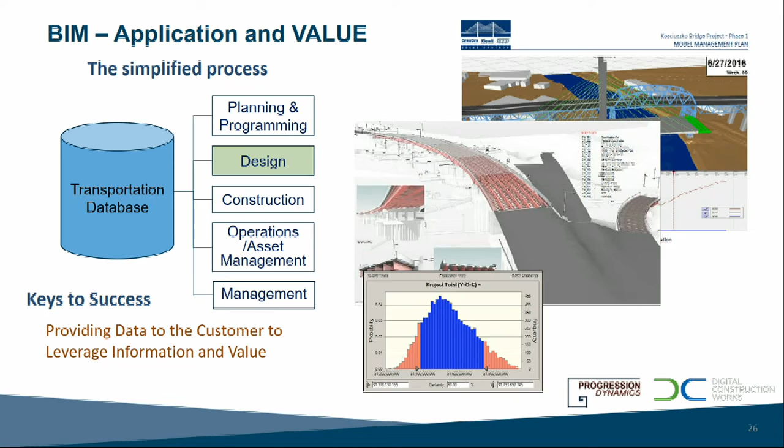So construction gets it, takes that model, and then enhances it to what their needs are. The contractor can take that model, slice and dice it, work on their constructability, work on their sequencing, work on their schedules. When we have a proposal with our BIM spec, they provide a model or animation of how they're going to build this project—all proposers.

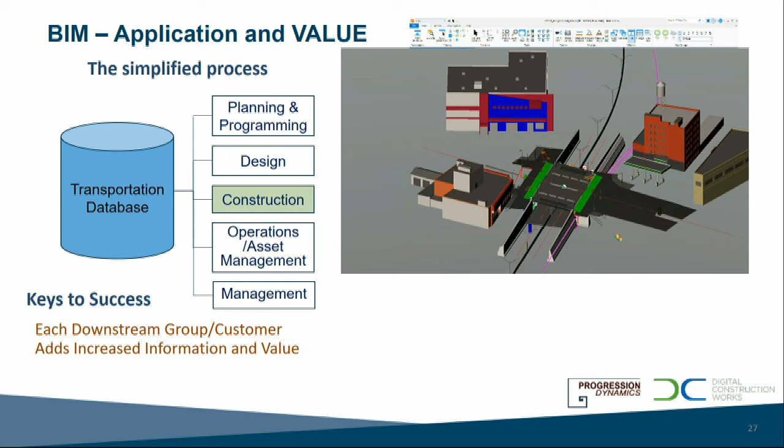So they're creating this model already. We're able to use that model in evaluating who the proposers are and how well their proposals meet the needs of the contract. So in construction, the BIM model is actually the contract document in some cases. We've had 2 contracts that way so far. And depending on the contractor, they can arrange that information and utilize it however they want to help them build the job, but it also helps us manage the job.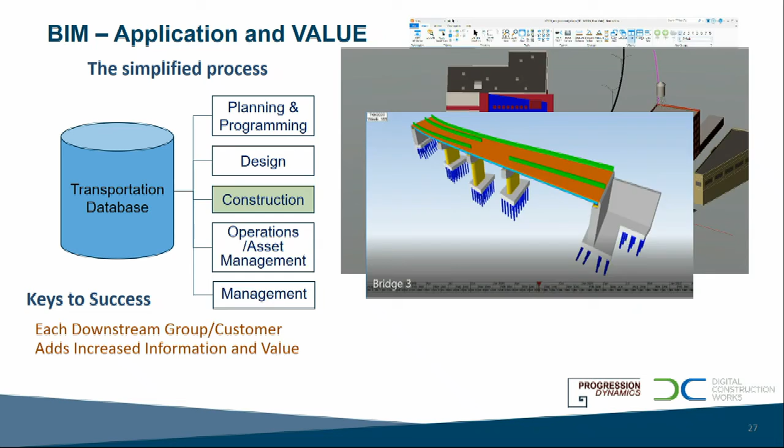And then these are some of the models that come out of that. Then it goes to operations and asset management. Here's Kew Gardens 3, as a matter of fact, our first BIM project, and then Kew Gardens 4, a multi-phase contract. This is the data that we have for operations—this is the as-built model that we then use for operations for their needs.

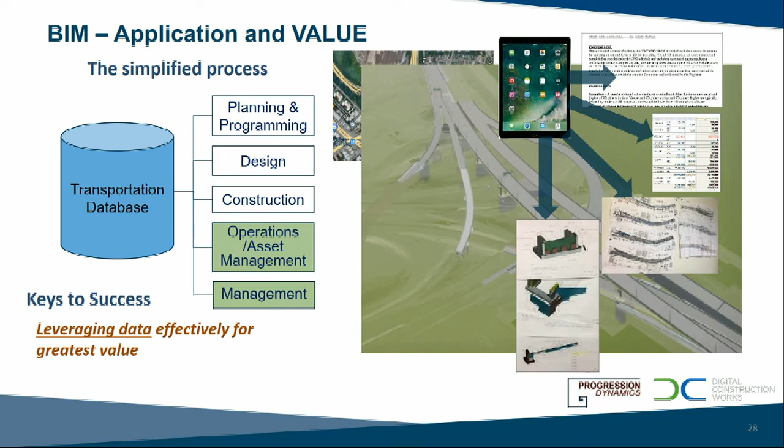So again, we're leveraging the data. It's an integrated information model, and the deliverable is the 3D model plus a GIS data set with all of the metadata associated to the assets, based on our GIS requirements. So again, we've got several areas in the agency contributing to how this specification provides information that they need to do their work. That's the value in it.

Okay, so one of the huge advantages of this model in construction is constructability analysis. We run into unexpected field conditions all the time, and this was a case of, well, we don't know how we're going to lift this strut. We think we can get a crane in there—can we really do it or not?

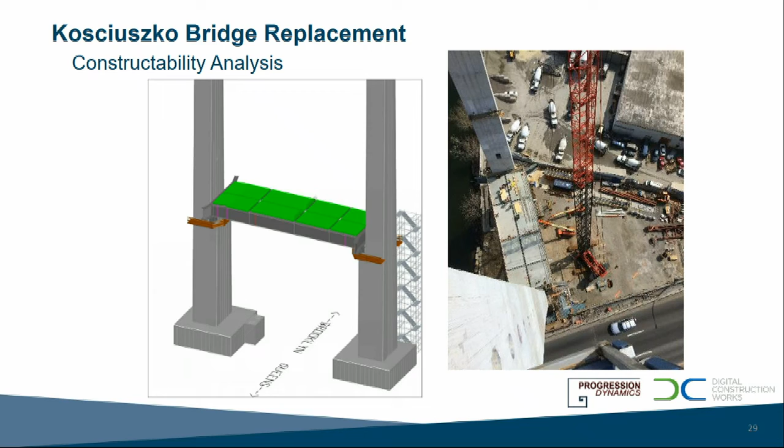So we modeled it. The contractor modeled it, did all their analysis. We determined it was going to work. They did it—it saved 6 weeks, at least. Just an example.

So when we do 4D, 5D animations for our projects, we review them on a monthly basis. They're submitted with a CPM schedule update—every month there's an update. So we can review what the 4D, 5D animation is showing us compared to the previous update, to see how that's going to affect schedule, and we also model cost.

So we have a 5D model included, and these are examples of the actual conditions on the site. This is Kew Gardens 4, and the actual modeling corresponding to that same time frame. So we analyze: are they on schedule? They can't just say they are—it has to be illustrated in their modeling.

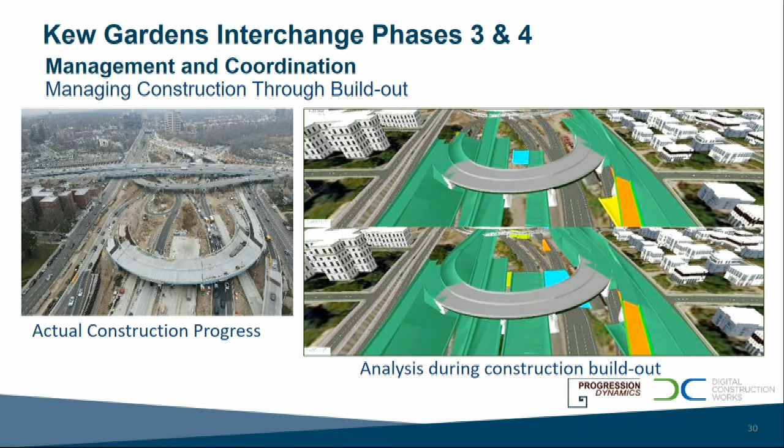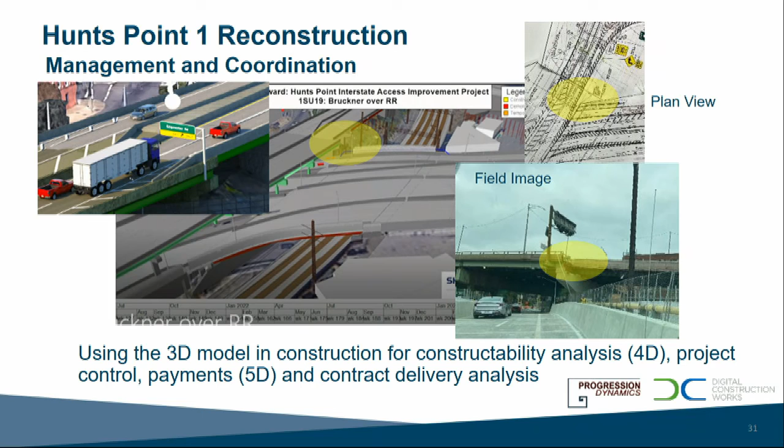Again, in the field, certain conditions come up. So we had an area that we felt wasn't modeled correctly. We're on the site all the time, looking at the plans and the modeling, and it became apparent to us that it's really going to be addressed in phase 2—this is phase 1. So it helps us look at the information available to see if the decisions in the field are being made correctly, and it gives us the opportunity to call those things out to analyze them.

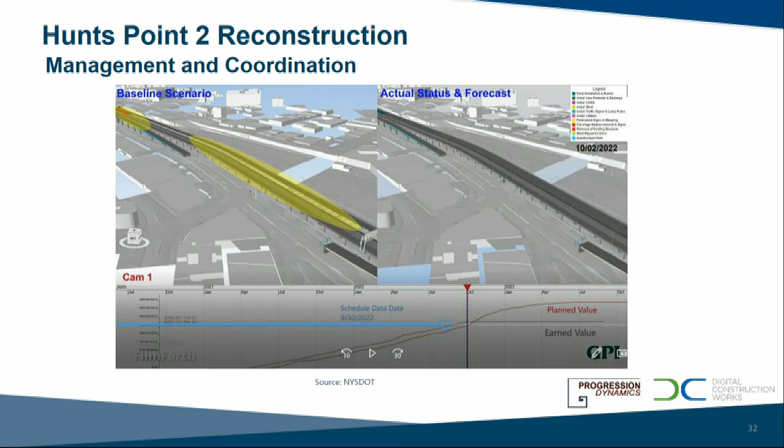So this contract is going on concurrently, right? And then you have phase 1, contract 1, 9 different bridges that cross the Van Wyck. All these projects are going on concurrently. We were able to do this because of BIM, because we're able to manage the data, the modeling, the sequencing of the work, how contractors work together. This gives us the ability to manage it in the best possible way.

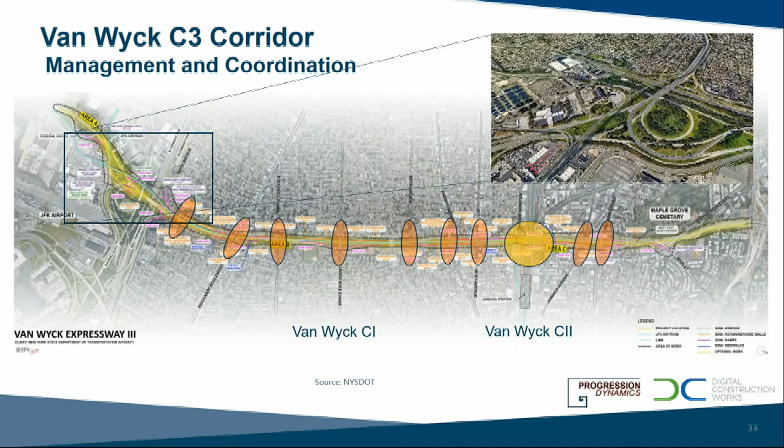And then, again, some examples of the deliverable, the as-built model. So the information provided from all the modeling goes to asset management. And they have now an updated record of the entire project contract area, all the assets, the metadata involved. I think there's 40 different metadata requirements involved, giving our asset folks exactly what information they need.

And how do we know that? Because we asked them. We said, we're developing these models. What data do you need as a customer so that we can provide that data to you in the formats that you need it, so that it helps build the information, helps build value. We're leveraging the data further.

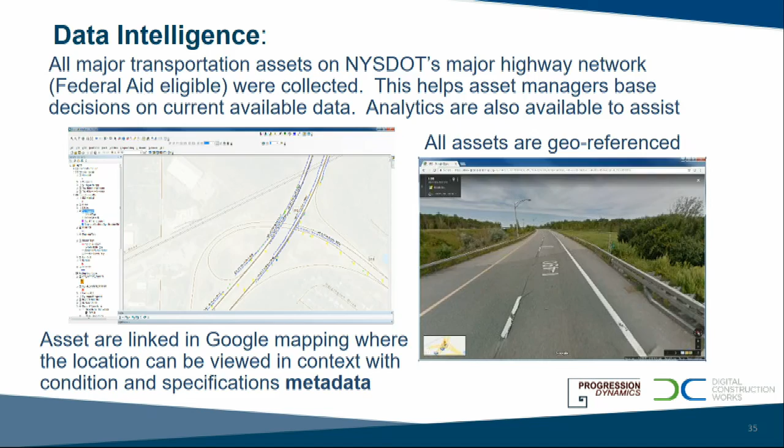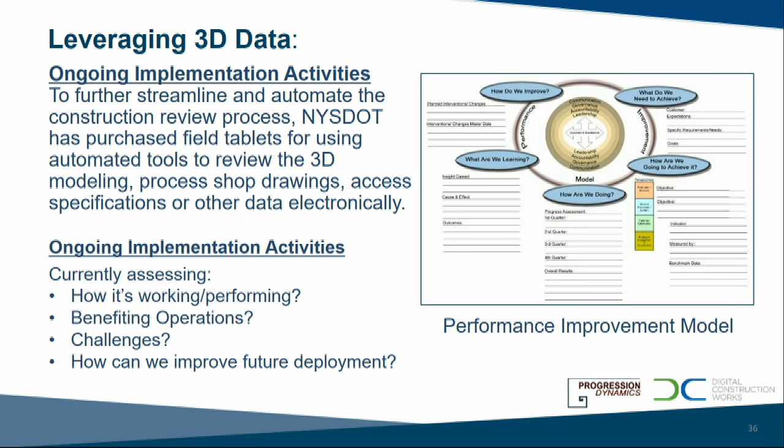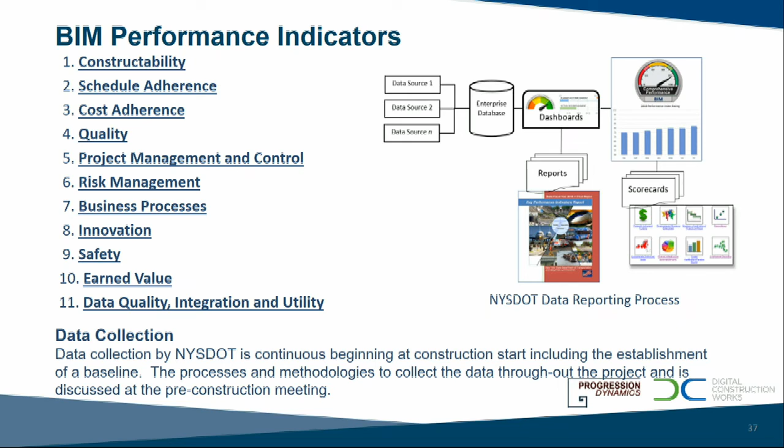And we're also measuring performance, right? So as we look at our first contract, we had 11 different performance indicators built in there. We measure that on a regular basis. These are the performance indicators. You can see them, I won't have to read them. But including innovation, we look at the business process. We assess those things, how it's improved the business process, quality, how we use the data utility, and data integration. All these things are extremely important, and it helps us report on success.

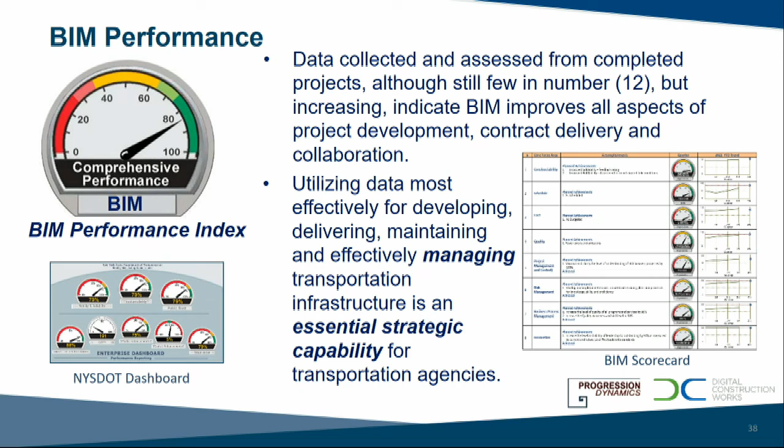So we have a dashboard that we have for every project. We keep this updated on a monthly basis, as well as scorecards on a monthly basis. And we have this conversation with the DB, design-build team, on a monthly basis, saying, here's where we're at. Are there some issues coming up? We can look ahead. We can look back and say, well, here's some things we need earlier, more timely, please provide. So it really does help us manage contracts.

And so far, within the number of contracts that I had mentioned, all of those projects have been on time, if not earlier, and on budget. So we need more contracts to continue to assess. It's a small population of projects, but we will continue to manage and monitor the performance of it. And so far, the results, the benefit has been significant.

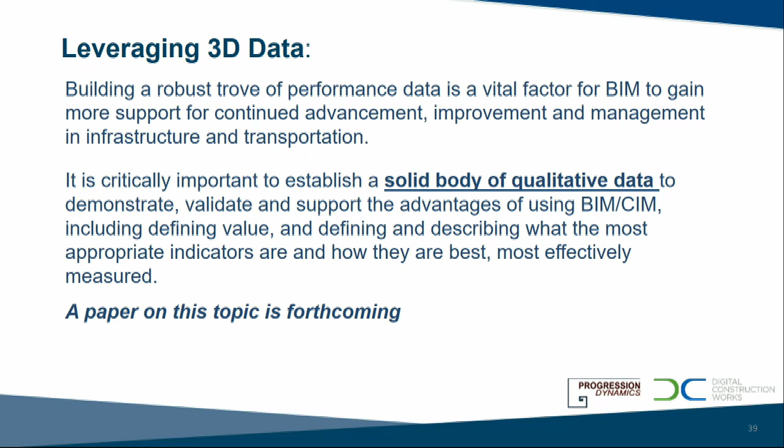So we're building on qualitative data, and that really helps us assess the performance. And so with that, we can measure and make adjustments to our specification if necessary, which we do. We tweak it quite often, depending on the contract coming up.

And the last thing I just want to say is for our takeaways. It's here. New York State DOT is using it. It's been extremely beneficial to the New York City region. But it does require champions. The director in the region is a big champion of BIM and has been since the start of our implementation. And it really does require that special kind of champion to help make sure we're going to sustain this program.

And I just wanted to say how the benefits have been significant, 10 to 20% benefit over cost. And we measure it on a regular basis, as I said. And that's pretty much it.